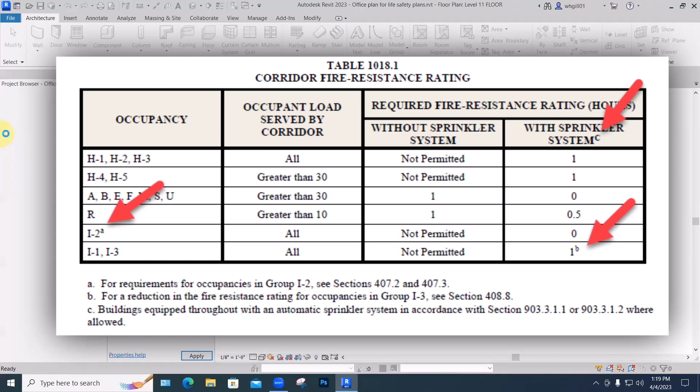Let me talk a little bit about the International Building Code and the Kentucky Building Code, which is based upon it. The infuriating thing to me about using them is that almost every number or diagram has a little asterisk or footnote, or 2 or 3 asterisks, saying, oh, but if it's a sprinklered educational facility, then you have to do 72 inches. And if it's a non-sprinklered residential, it's full of exceptions.

I know that they started out trying to make it very clean. But because buildings have so many different parameters and people use them in so many different ways, they have to figure, oh, well, yes, that needs to be more stringent, this can be more lenient because everybody's awake. Finding my way through the exceptions is the hard part.

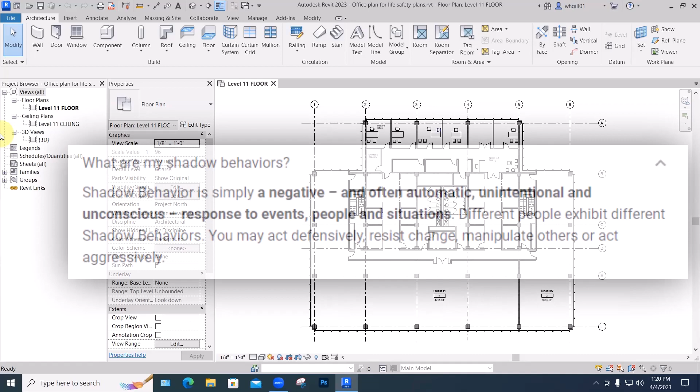I had sort of an epiphany years ago when I was an art major. I really didn't want to get involved in the codes and the numbers and table after table after table. But then at one point we had to do it, and I really came to value who knew how to do it well and did it. It's sort of like I had to appreciate my shadow side—the stuff that I've been pushing away really is an important part of being a complete professional.

Although in this case, it was like being on a professional team where we had different responsibilities. So the revelation was realizing that I had to honor the ability of the person who could do it well, instead of resenting the limits that her research placed on my designs.

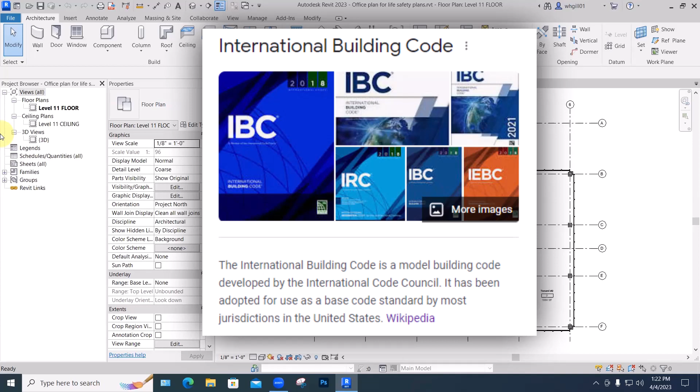Most states use what's called the International Building Code, which is available free online, nicely indexed, good searching. Buying it is expensive, like $100 or something.

Maybe more. All the state building codes, which actually govern construction, are free online as PDFs. The Kentucky Building Code, it's like they took the International Building Code and added some stuff for bourbon, distilleries and all that kind of stuff.

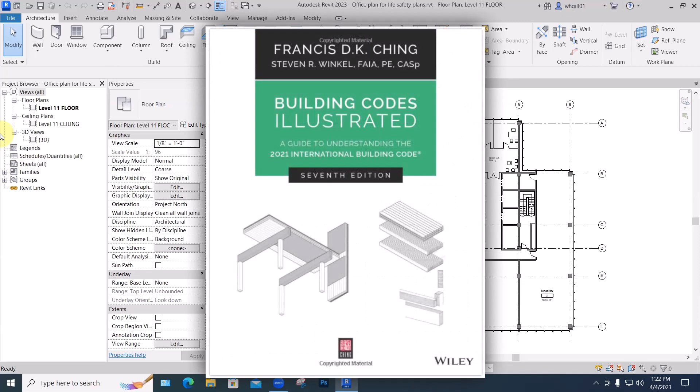What's useful there is that in the International Code, the Kentucky Code, and here in Francis Ching's excellent Building Codes Illustrated, the numbering stays the same. The sections, the diagrams, the tables all have the same numbers attached to them. Even if a state code cuts out part of the model IBC code, say section 1007, it will skip from section 1006 to 1008 and not renumber everything. And the section numbers remain the same from year to year. So eventually you get to know your way around.

If you master and get good at it, you'll make a lot more money than the designers will, because managers and technical people who can do stuff well, people are willing to pay them extra to do that. In large projects, I mostly work for an architect who is good at that. And he does a lot of multi-use buildings, which is residences upstairs and offices in the middle, and then shops on the first floor. And that gets very complicated with all the fire separation assemblies you need to have between those. So let's just see where we get with this.

First of all, we're going to be making a lot of notes on our life safety plan, stuff there that applies that we'll do to another. So I'm going to take my level 1 floor plan, or level 11 I guess this is, duplicate it, and I'll duplicate with detailing. So I pick up whatever is already here in the way of annotation and grid lines. And I'm going to call it level 11 life safety.

Within each room, which has its own door out to either a corridor that gets it to an exit way, or gets it to a corridor that gets it to a corridor that gets it to an exit way. Every space has some sort of door closing it off, and we have to decide how many doors does each room need and how many doors does each suite need, which is what I'm using to describe this area up here. And without going into giving them all rooms and names and numbers and adding them all up, what's the quickest way just to know how big that suite is?

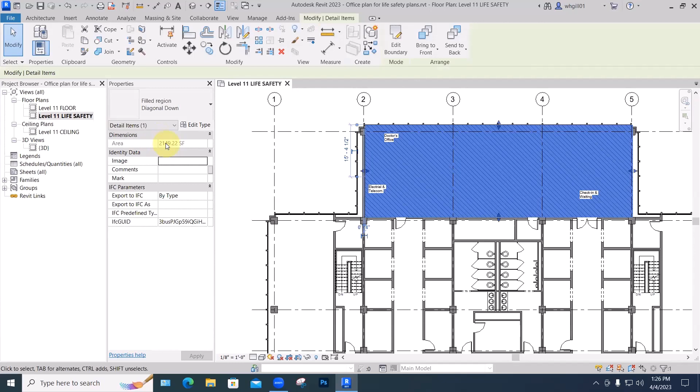And really the quickest one is to go into annotate, region, filled region. This is just a hatched area. And I'm just going to make a rectangle here. We can use the shape tools, but just like this, big. Okay, so we're going to start thinking of that as a suite. And when I select it, I can see that it's, let's call it 2,200 square feet, just to be on the safe side.

So knowing that, well, this is where the spreadsheet would come in handy. For general office use, we have a number of 150 square feet per person. So what we want to have here is 2,200 divided by 150. It used to be 100, they've just bumped it up to 150. Who's got a calculator? 2,200 divided by 150 is 14.667, call it 15. That's the occupancy of that space.

The general rule is up to 50 people, you can have just one door. Well, 49 people can have one door. Starting with 50, you need two doors. This is a suite that provides two, and that's fine.

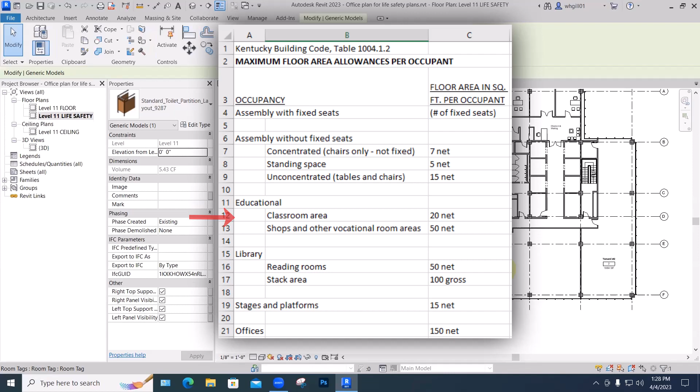Let's take this one down here, it's a little bigger. So this whole space is 4,700 square feet. And let's say it's going to be used as a classroom. It's a Kaplan Academy, everybody's packed in doing that kind of stuff. And for people at desks, that's 20 square feet per person. So 4,700 divided by 20.

Okay, 235. That's more than 49, so we need at least two. It's less than 500, which is where we kick into three. So we clearly need two doors for this space down here. So we're good for that.

Except there's one other thing: two doors right next to each other are not going to be useful. That's just like one big door, they go to the same place. What we want to have is two doors essentially as far apart as possible, and in fact there's a minimum distance. The way they do it is I'm going to draw a line, you do a big diagonal line across the whole space from one farthest corner to the next farthest corner.

This one's bigger than that one, so we'll use this one. And it can go outside the space, it can even go over a courtyard, it can go over trees. It doesn't matter, just farthest point to farthest point.

And then the doors need to be at least half that distance apart. So if we pick this guy, we see that that's 131 feet, and half of 131 is 65. So let's just do a line from here to here.

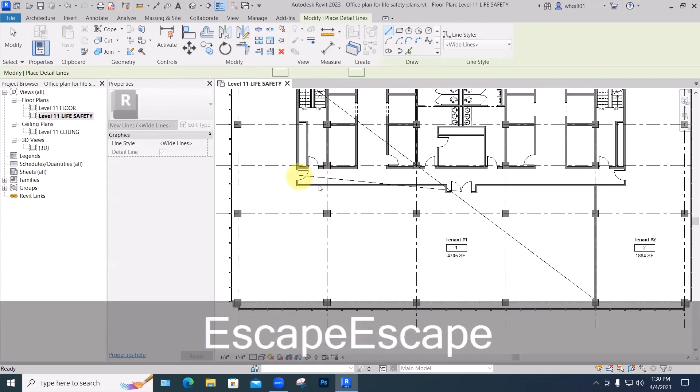It can technically be from the nearest point to the nearest point, but really you might as well go from center line to center line. And we see that this guy is 48 feet, which is less than half the diagonal, less than 65 feet. So I need to be at least 65.

I need this... well, we can't move this door any farther, it's just not part of the property. So I have to move this door over, so it's at least 65 feet from that one.

From this door to this door, I'm just using a draw line and then picking the line, it's 48 feet, which is too small. They're too close together. I need to move this one farther down here.

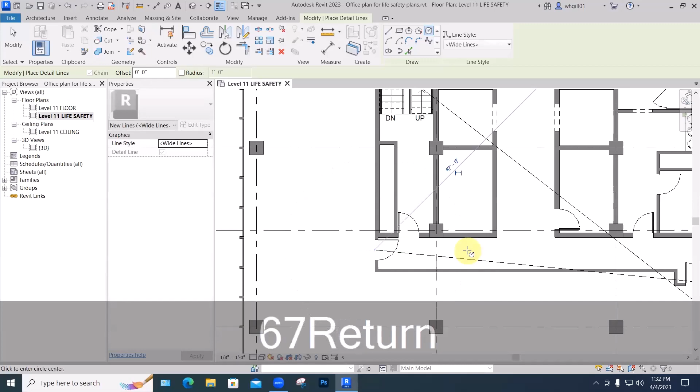So what I'm going to do is just draw a circle from here. Half of 134 is 67 feet. So my new door has to be somewhere on this arc.

And seeing how this is working out, I think I'm just going to move all these guys over to center them on the elevator corridor, which is where they were to start with before I started messing with this. And we know this is far enough away because it's outside the circle.

The farther the better. People say, well, what if I have the opportunity to do 3 doors? As long as 2 of them are this halfway distance, any others you can put essentially anywhere you want that's not right next to the others. That's very loose with the fire marshal, and you can decide, I need it over here because it's near the women's bathroom or something, whatever you want to do.

But this is the big one, and this is fine for everything up to a big auditorium. So that's just for one room with its doorways.

Let's say this was all one big suite with multiple offices that haven't been laid out yet. So there's that, this is now much bigger. Get rid of these, let's just look at this one and see if this is still good.

I'm going to do a big diagonal again, which will go from here over to here now. This would be like if a single tenant was coming in there and wanting to know what they could do through there. So that's 153 feet, let's call it 160.

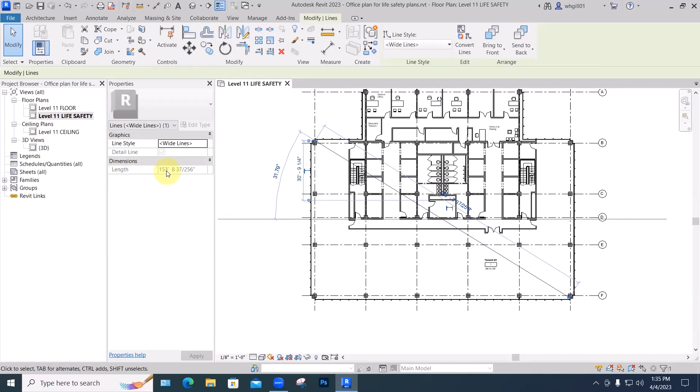So I would like to have 2 doors that are at least 80 feet apart. And I'll go to dimension from here to here, that's 95 feet apart. So that's great, those 2 take care of all of our egress, and I can put this guy anywhere I want as our main reception entrance.

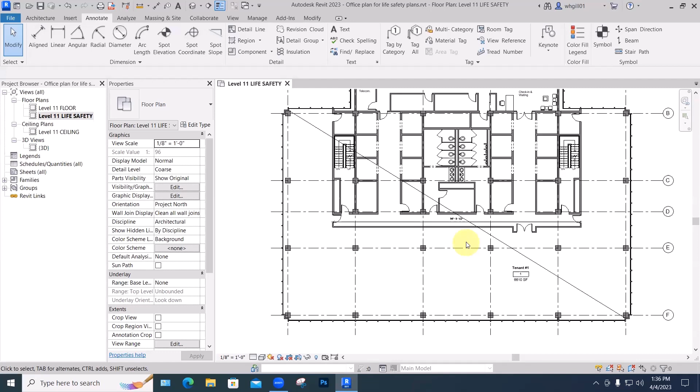This makes me think, seeing that this is 160 or something, probably whoever laid out this building, if this is a real building, was thinking, okay, how do we arrange the doors so that a single tenant could use that space? Let's get rid of this door because it's actually not required.

There's so many further considerations, but one would be, let's just draw this on the board briefly. Okay, let's say I have an office plan like this, and I've got office out here, and there's another hall, and a staircase out here, and one down here or something. The person exiting this room to start with has only the one choice of coming over to there, and they've got to look and make a choice.

And it's full of smoke. He doesn't know what to do, and it looks less smoky this way than it does over here. So he comes down here, and he gets here, and it's still smoky. And he's saying which way to go, right or left. He's never been there before.

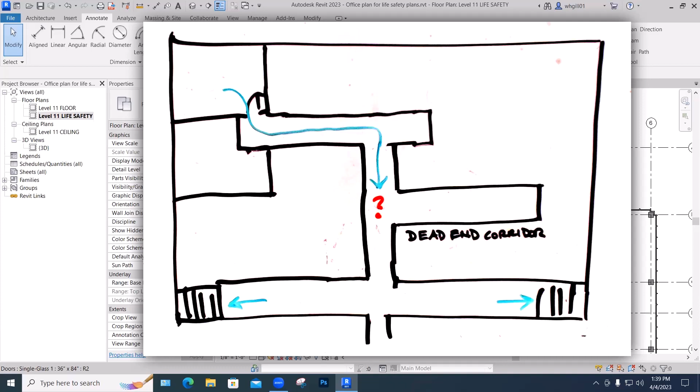He's getting frantic. And what you can't do is have what are called dead end corridors. Let somebody go down there and get to the end and realize, oh crap, this was not the right way to go after all, and then have to come back and make that decision again. So there's a limit to how long they can be, so you haven't wasted a chunk of time crawling to get to the end. Normally that's 20 feet. It's not much.

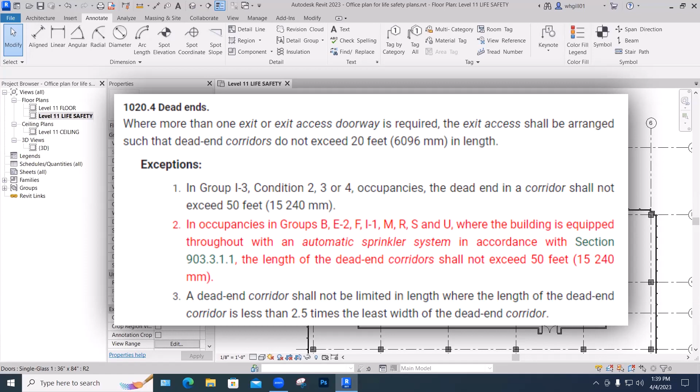Under some circumstances, the corridor can be longer than that, and the limit does not apply at all if the length is less than 2.5 times the width. It's almost like going into a big wide space in the hall. I've really never seen that used, except in cases where other rooms come off that space. In a large floor plan, it gives you flexibility since every door of every room doesn't have to open directly onto a corridor.

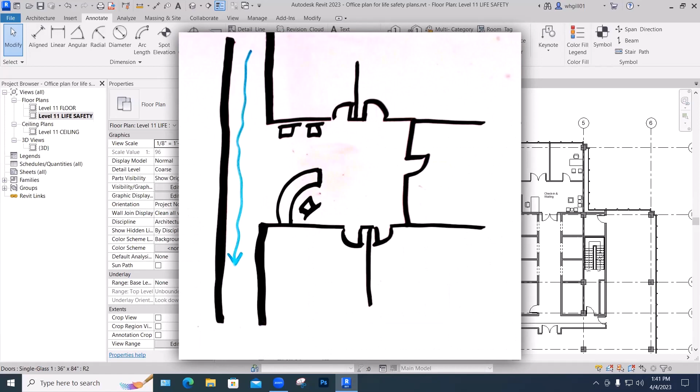The dead-end corridor rules do not apply in a situation like this, where only one exit is required. People come out here, they come down the hall and go out. These are smaller areas where presumably people are more or less familiar with what's going on.

If the required corridor width is, let's say, 5 feet, when the doors swing out, they can't take up more than half of that. They'll swing back against the wall, but even at their widest opening, with people streaming by, you don't want them taking up more than half the space. In no case can they stick out more than 7 inches into the required width when opened as far as they can. So if this were the full required width here, we'd have to move this door back, move this wall down, so it didn't stick out more than 7 inches.

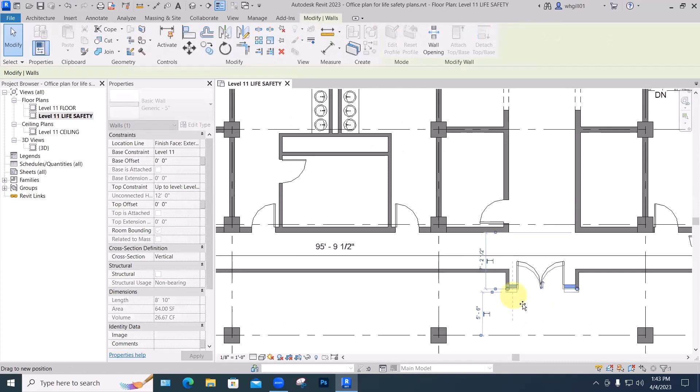The whole field of life safety combines broad concepts with minute details, such as: do handrails count as making the stairs less wide? I forget, I'll have to look it up.

Now here's something, a tool that Revit has. It's new, interesting, and sort of fun. It's called Common Path of Egress Travel Distance.

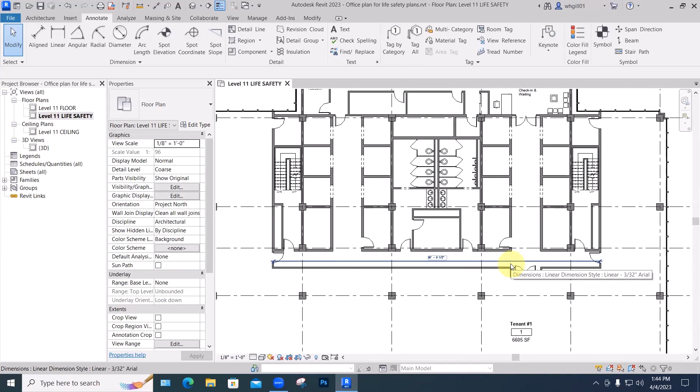This is the distance from the most remote point in each space, let's just say a room, to where you have a choice of paths. If I started back here in this room, which is farthest from the door, and drew a path from here, with a door here and a door here, I just have to get to this point before I can choose to go in 2 different directions. If we don't have this door, this person has to travel through here, down to here, before they can choose to go to this staircase or that staircase. And this isn't diagonals—this is actual people walking through the space and not bumping into furniture.

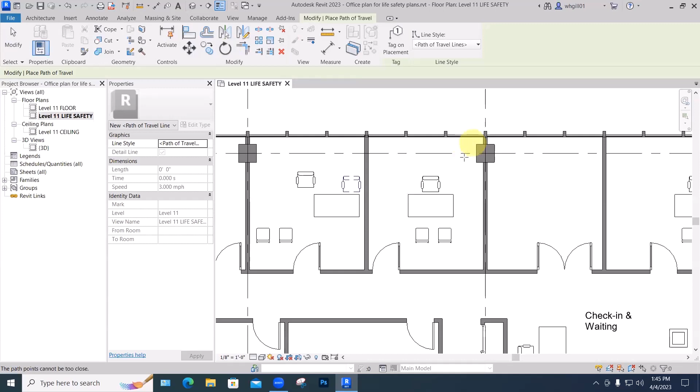So that's over here in Analyze, this thing called Path of Travel, where you just click 2 points. It creates a path of travel along the shortest walking distance between 2 selected points. I'll just pick it right here—say, someone's back there watering the flowers and the alarm goes off. So I start there and I need to get to here, where I will choose which staircase to go to.

So Revit calculates it, misses the furniture, misses the walls, goes through the doors, misses the reception desk, comes through the doors and gets to here. Then I can see that line is essentially 87 feet.

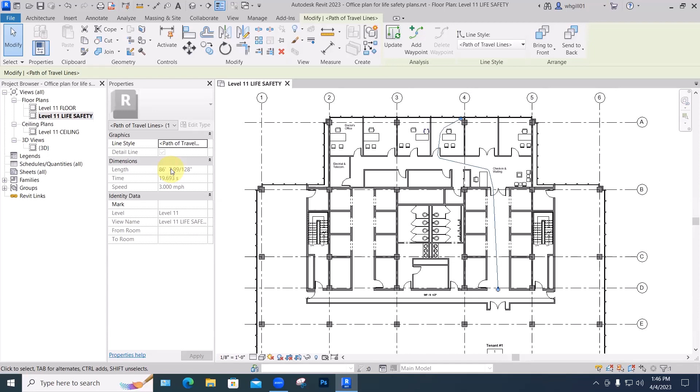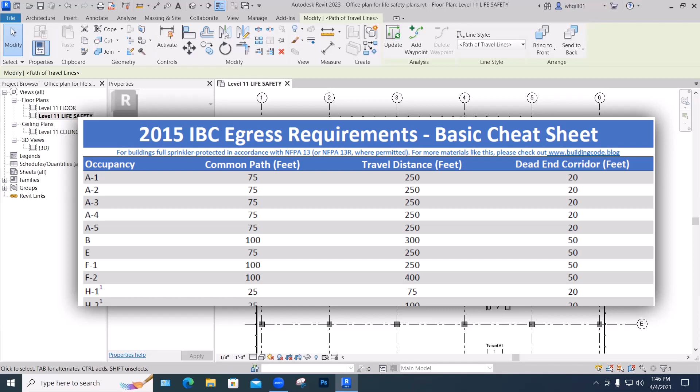I'm sort of throwing Schneider Hall in here. For educational occupancies, that distance is 75 feet. Here's a quick summary of the most important egress distances: for sprinklered educational occupancies, the maximum distance to the point where you have 2 choices of exits is 75 feet. The farthest distance from anywhere in the building to a building exit is 250 feet, and the dead-end corridor length in a sprinklered building is 50 feet, 20 feet in a non-sprinklered building. Schneider Hall is partially sprinklered—which one applies? I don't know.

A couple words just about exit corridors. As a general rule, every exit corridor used to get people out of a building in an emergency has to be at least 44 inches wide. That's a given, unless, as up here, the occupancy is less than 50, in which case this could have been 36 inches wide. So if the building owner was really trying to maximize the space, we could do that—entirely legal up there because our occupancy is so low. Was it 16 people? What do we figure that was for that suite? 14.

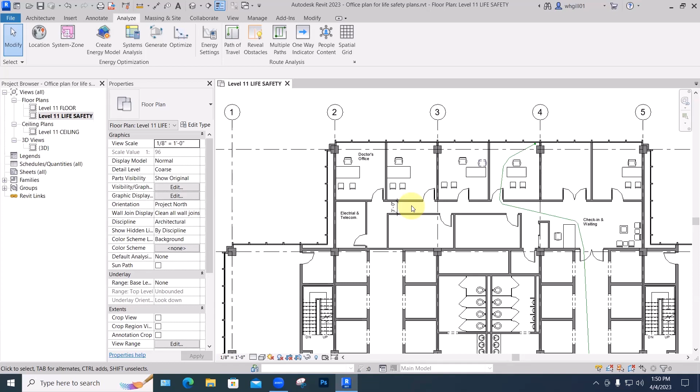Something the fire marshal will say is, I see that you've given me 14.6, but I see 18 chairs in there. There always is the circumstance where your actual use can be documented as being less than provided. In that case, you can ask for a dispensation. But in a case like this, where occupancy is less than 50, we're still way under. We're never going to get 5 people in each of these rooms and 10 people in the waiting rooms. That's not going to happen. And bathrooms don't count because we figure they're coming from somewhere else.

Educational institutions, one of the reasons these halls are so wide is that the minimum width for educational use is 72 inches as soon as the occupancy is greater than 100, which it almost always is in a school.

If we're trying to determine how big egress corridors need to be, this is down towards the bottom of page 1. For lots and lots of people, they want 0.2 inches of width for each occupant served. So if you have 200 occupants, that's 200 times 0.2, which is 40 inches. But code minimum is 44 inches, so that's one little asterisk. And if it's a school, it's 72 inches. So all sorts of stacking exceptions on top of each other.

Stairs are another case where we have 0.3 inches per occupant. The real rule here is that as people go from an occupied space through corridors, down the stairs, and out, we never want the capacity of that exit way to be diminished. We don't want 100 people coming down the stairs in a minute and then only 30 people able to get through the doors, or 40 into the next corridor. We never want people getting jammed up leaving a building because the exit route capacity got smaller. You want the capacity to at least stay the same, and presumably get wider as you go down, because you're picking up people from upstairs since the staircase is one of our required exits for the first floor.

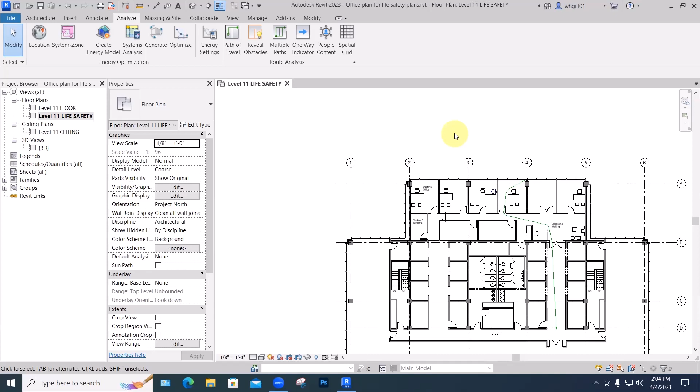They're right in the middle of our floating neon light sculpture, whatever that happens to be. But let's just see where we go with this. In terms of placement, if we're just roughing it out or want to suggest a layout to the engineer, which is entirely fine, it'll be his drawings with his stamp that go out with the actual locations and sizes. We can say, this is how we were thinking of doing it.

How about it? So I'm going to take my ceiling plan—I'll just do this on the regular ceiling plan, so we don't have to have a separate life safety plan. The universal symbol for a sprinkler head is just a big round black dot, which you can place as a big round black dot, but you might as well have it done with a Revit tool, using Architecture, Component, Place Component. I'm in a ceiling plan view here.

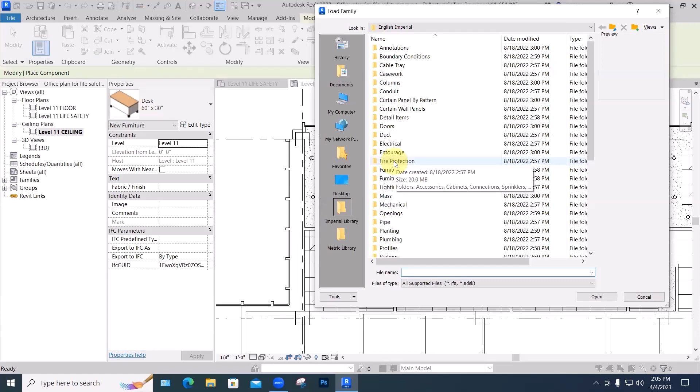We're loading the family here, we've got a whole fire protection category to load. Everything you want to do, but we just want sprinkler heads. And I'm going to recommend we use this one, sprinkler dry pendant hosted.

Let me digress a little here. The point of wet and dry is, these are by default wet, some of the systems, I don't know which ones we have here, but some of them have pipes always full of water. So as soon as a sprinkler head senses heat, it opens and water is right there immediately to drench everything. However, they go off if you hit them with a ladder, or if somebody sets off a smoke bomb, or was playing around in a class and blew smoke at it.

So the wet ones are ready to go. Dry ones, the pipes are all dry, but when one of the sensors, wherever that happens to be, smoke detectors, figures there's a fire, a switch is thrown and releases the water so it can come down. That makes it much easier to add to the system because you don't have to drain it ahead of time, but you can still add things to it usefully.

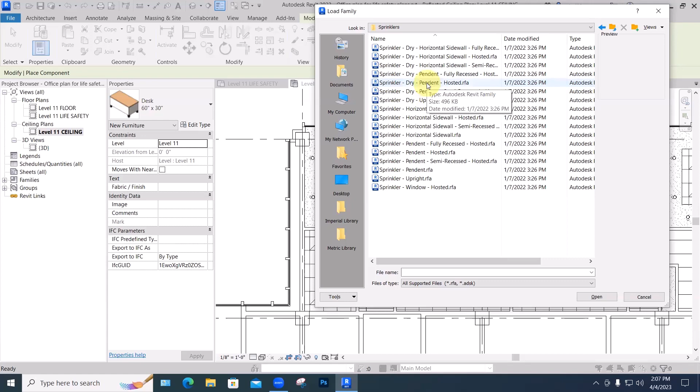But I'm just going to use this dry pendent hosted one. Hosted means it just wants to stick itself to something, in this case it'll stick to a floor or a ceiling.

It loads that, and then we want to place it on a face. We want to place this on the face of the ceiling that we're looking up at. I'm just going to try, let's just put it in the middle of these two guys and see what we get. So nice, symmetrically, nicely designed, lovely look.

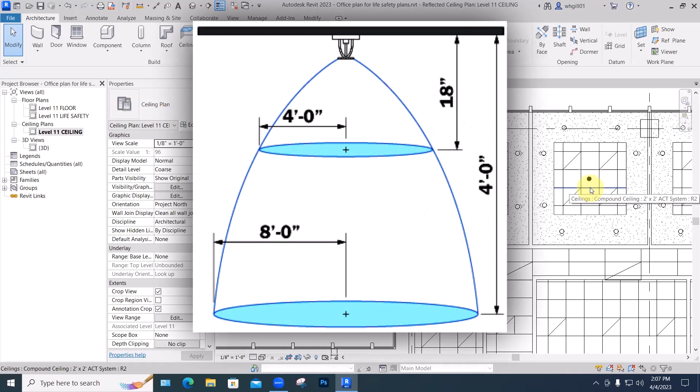Each of these heads covers approximately a 15-foot diameter circle, so let's just see what that is. I'll do it with dashed lines or demolished lines or something. So that would be 7.5 feet radius. Okay, I'm sure the engineer will be happy with that.

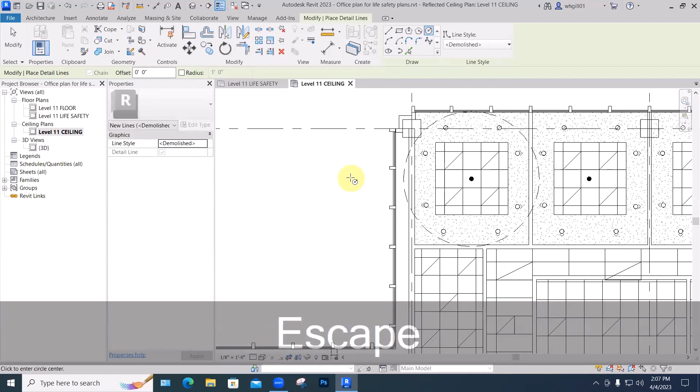We don't have to do two in there to pick up the corners. It's going to be trickier going down the hall, which, if this is a building required to be sprinklered, we really need them there because this is how people are going to get safely out to wherever they're going. So let's just say we're required to do it here. They sort of don't like them to be closer than 7.5 feet to a wall, so we're not really working in the optimum range here.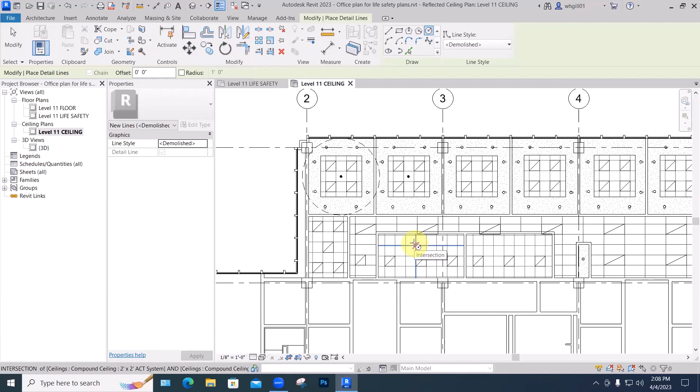We could widen the hallway back again. And I think at this point, that's when the engineer would come in and say, oh, you need special narrow beam sprinkler heads down the middle. Depending upon the situation, different types of heads can aim up, down, sideways, or on a slant, be exposed or concealed, recessed or projecting, hung or mounted directly to the ceiling.

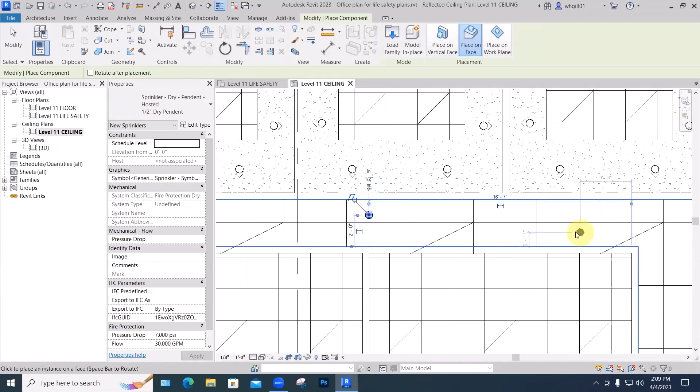For me, I just say okay, I know I'm just guessing here, but it means that I am at least paying attention to what might have to happen in this space. And then they'll come through and say, no, that's not going to work at all. Yeah, I don't actually have a ceiling put in out here to be able to do that. But in a building like this, you would certainly have the sprinkler heads in this whole common area, which is getting us to the stairwells.

Bathrooms need them as well, even though there's nothing flammable, there could still be a cigarette butt in the trash can or something like that. What else can I do here while I'm at it?

We sort of look at each room and then at this suite. What if we consider, this is the 11th floor of this building. Let's consider this floor as a whole and make sure that we've got enough ways out of it. So let's find out what this whole area is. I'll just use that annotate region, filled region. This is very approximate. Actual calculations would subtract out the corridors, elevator shafts, and stairwells.

What the spreadsheet I set up did was just let you figure out the area of each room, suite—which I'm defining as a bunch of rooms that have a common entrance and egress route—and how many doors the suite needs. Then you add up all the suites on the floor and see how many exits that floor needs.

Since Schneider Hall upstairs only has that one entrance out front, it has to have this one, plus the other one down at the other end of the hall, which has its own set of fire doors and sprinklers from the stairwell to the exterior door facing the BAB. That entrance off the patio and that staircase are as far apart as possible for the first floor, and this is sort of the extra third exit that's put pretty much wherever they want.

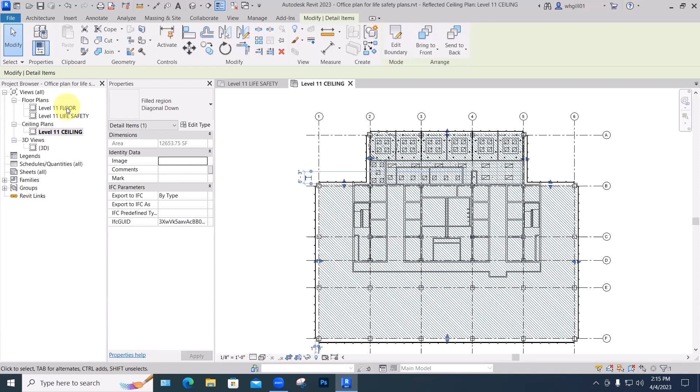Oh, I should have been in a floor plan, not a ceiling plan. We got about 100 people, like 98 people, on this floor—that's more than 50 and less than 500. So two exits is fine, and those two will suffice for the whole floor, not just for this suite, but for everybody here as well.

So we want to look at it from the point of view of the room, from the point of view of the suite, and then from the point of view of the whole floor. And then the last thing is, how do we deal with this in terms of the whole building?

In the World Trade Center, 3,000 people died on 9/11, but 25,000 people walked down the stairs and got out of the buildings, even though, as later investigations showed, there were too few staircases and they were too narrow.

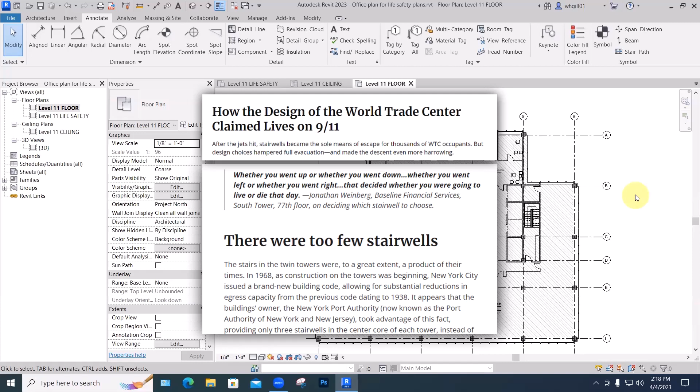You can also factor time into that, and this is when it gets way beyond my ability or knowledge to deal with. But if a whole building is being evacuated at once, the people on the top floor are doing this at the same time the people on the next floor are doing that. So you never have the whole 20,000 people on the same floor at the same time—you've got 5,000 people here, 5,000 here, 5,000 here, just working their way on down. So there are a lot of human engineering—logistical, ergonomic studies about how people actually move through a space—that I'm not qualified to talk about.

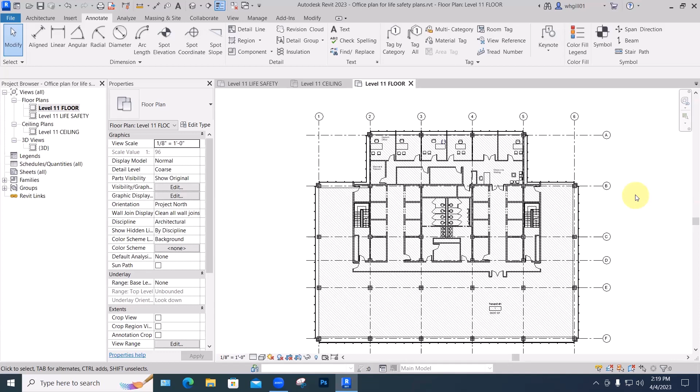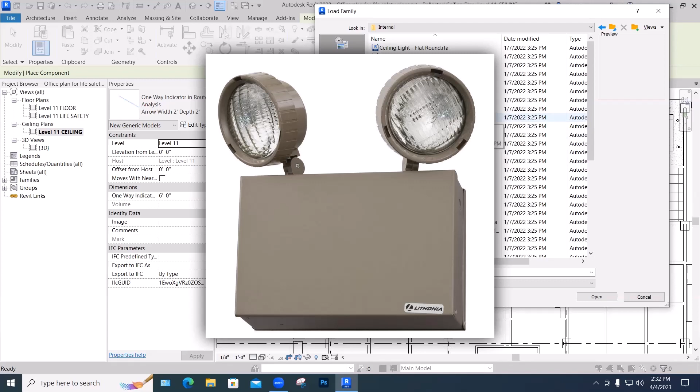One thing we need to be sure to include is exit signs. Here they have the emergency lights, which are just the ones that aim in both directions and run off a battery when the power's off. Emergency wall light—oh, I remember, it's in specialty equipment.

Specialty equipment, fire protection. Okay, exit sign. There we go. Okay, nice, looks great. Specialty equipment, fire protection.

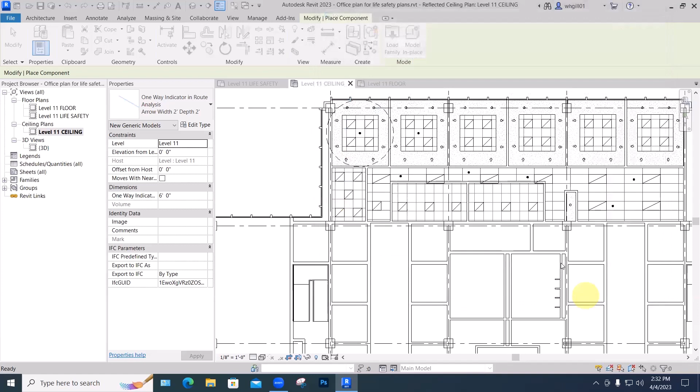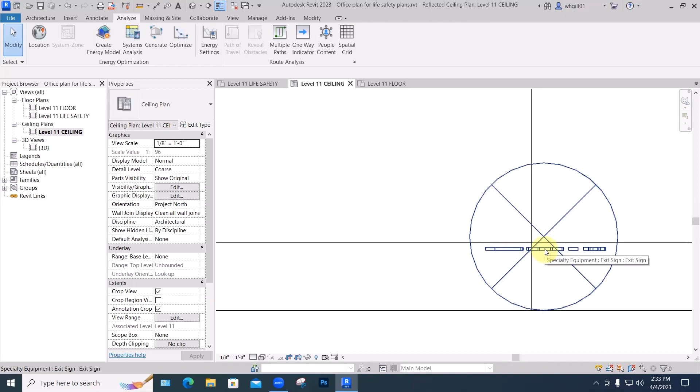I should say they look different in plan. This is just the standard look for an exit—it's just an X for exit. What you can see here, what we're looking down at, is the letters that say exit. So I guess we move it in there and we'll take a look at that in 3D.

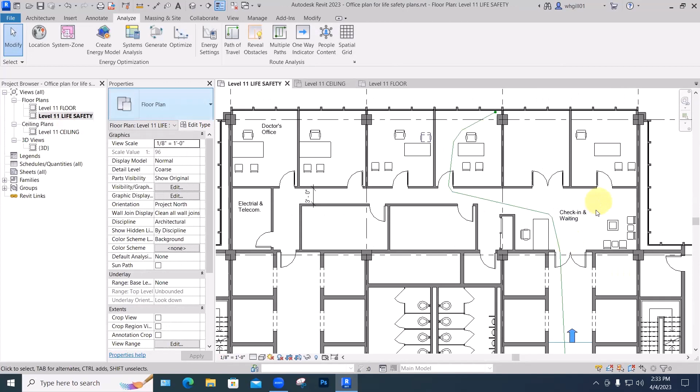Oh, what am I in now? I'm in a ceiling plan—floor plan, life safety plan. It's not in the life safety plan, which is where I would like it. Let's see if I can place it here. No, it's going up to the ceiling. View, camera. Okay, so that's that guy, and that's all we need to do.

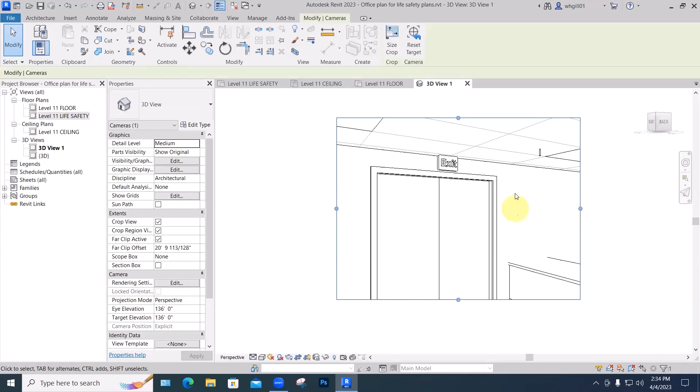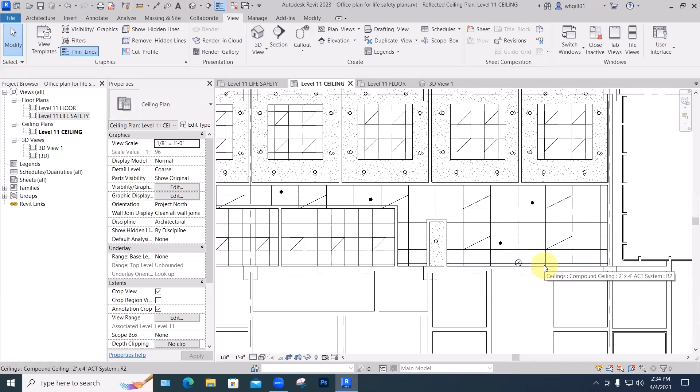This is the kind that actually just hangs from the ceiling, essentially, so that when we do it in the ceiling plan, we don't want it stuck into the wall. So there's that—we would want to have that there. Oh, I don't have any ceiling to stick it to here. Let's put one in.

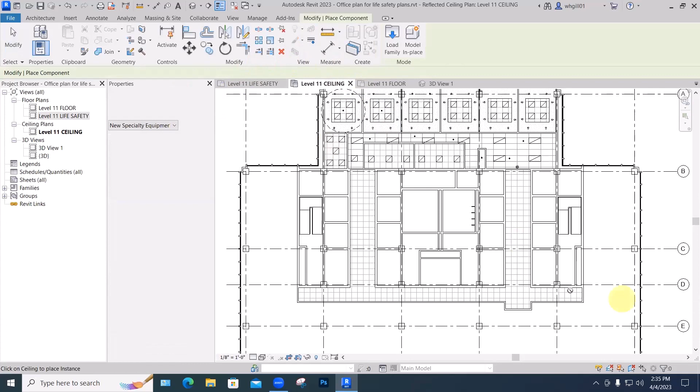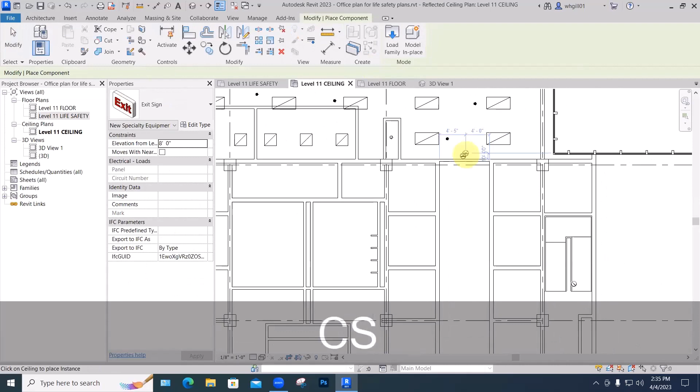Architecture, ceiling. CS. Why is that not working? Exit sign. Create similar. Okay, there it goes.

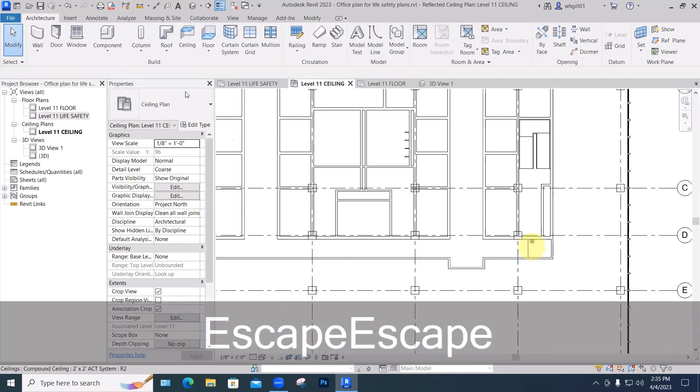Now, something like this, I think you want to rotate it, so that—view, 3D view, camera—people can see it from where they're coming from. So pay attention to that.

Your ceiling and ceiling life safety plans might well show identical building elements—lights, sprinklers, and exit signs—but have different tags and annotations appropriate to each view. I think that's about all I can think of.